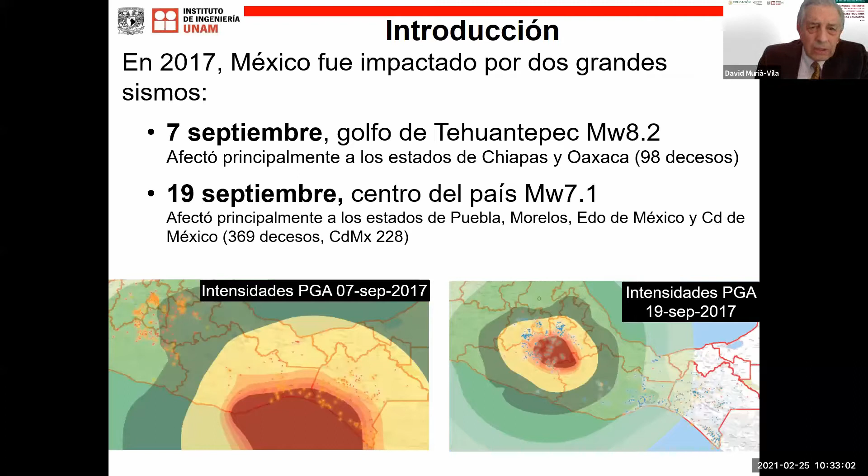The number of deceased people increased to 369, out of which 228 were located in Mexico City. The number of affected school buildings was higher, 19,000. 63% were minor damages, 36% were moderate to severe damages, and 1%, 210 schools, required reconstruction of part or the totality of all school buildings.

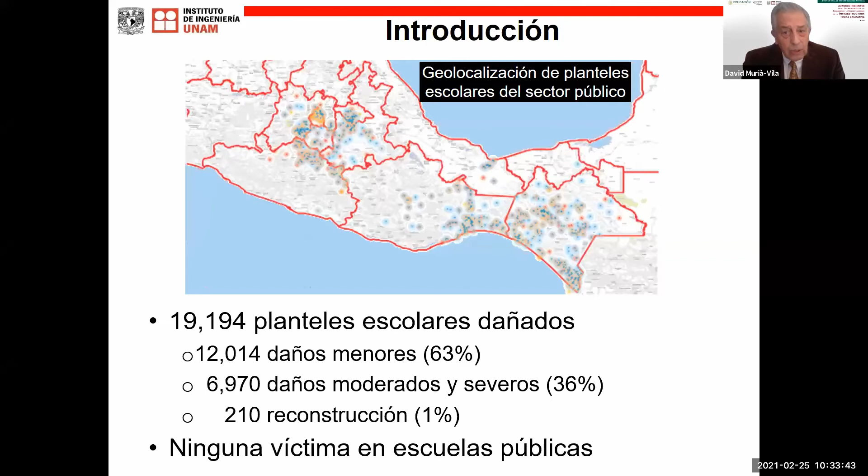In the case of public schools, there were no victims.

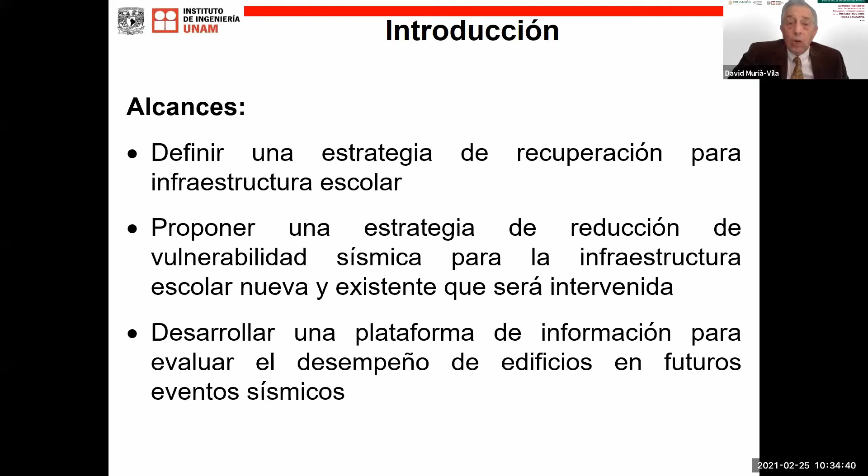The Engineering Institute partnered with INIFED and the World Bank to contribute to the gathering of evidence and the promotion of a wide and safer school program, to generate knowledge based on evidence, analyzing school buildings' performance in these events in order to inform and document the recovery process. The scopes we defined were to define a recovery strategy for school infrastructure, to propose a strategy to reduce seismic vulnerability for the new infrastructure that was going to be built or intervened, and to develop an information platform to assess the performance of buildings in earthquakes.

We set up a database. This database includes more than 12,000 buildings, amounting to 13.2% of damaged schools and 35% of schools with moderate to severe damages. We found that the quality of data varied, as well as its integrity, so we will have to put in effort to increase that quality.

We heard just a moment ago that we have created this database, which is a great thing. I don't know if it's covering all cases, but it will without a doubt be very useful for the study of damages. School buildings were classified according to the material and their prototype. The prototype means the buildings that were designed and built by INIFED and CAPFCE over the past 75 years.

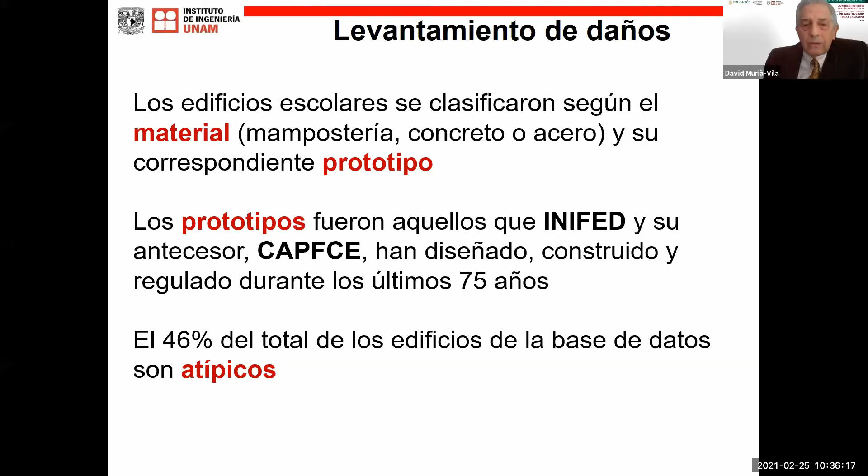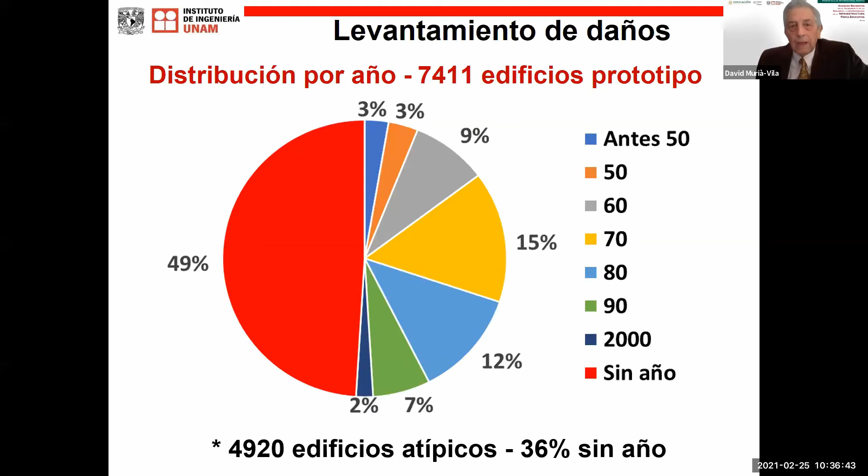In the database, 46% of all buildings correspond to buildings that did not belong to a prototype. In these prototype buildings, we don't know the year of construction, we don't know their birth certificates, which is an important piece of information that we need to know.

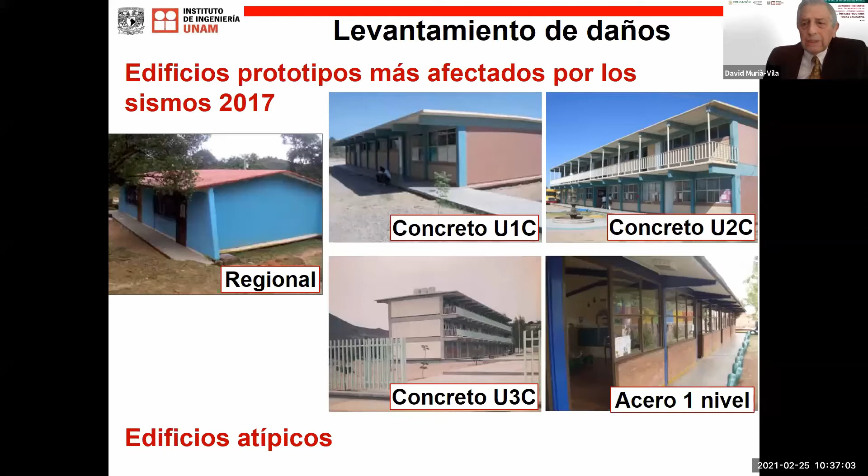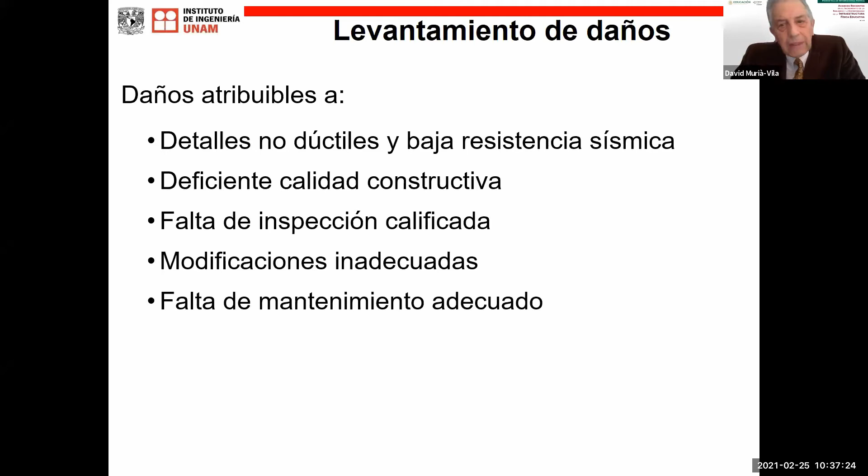The most impacted prototype buildings were the original prototypes: the 1, 2, or 3-story concrete buildings, and steel 1-story buildings. The damages can be attributed to a setup of non-ductile details, lack of constructive quality, lack of maintenance, and lack of inspection. The construction age in Mexico is important.

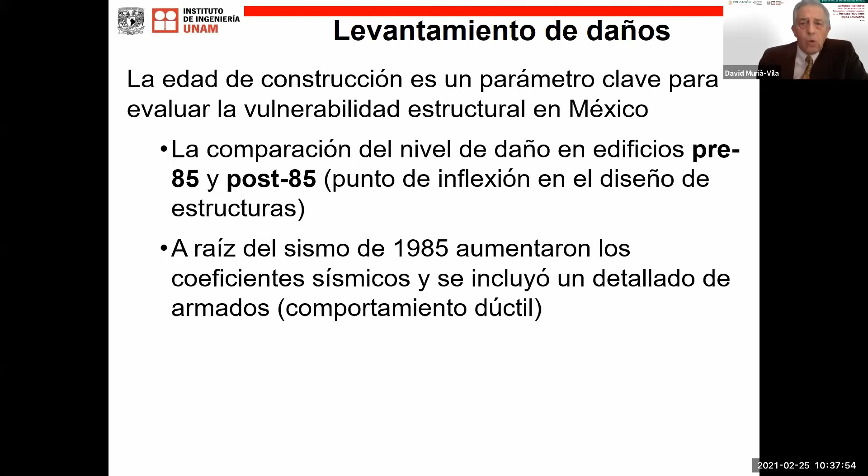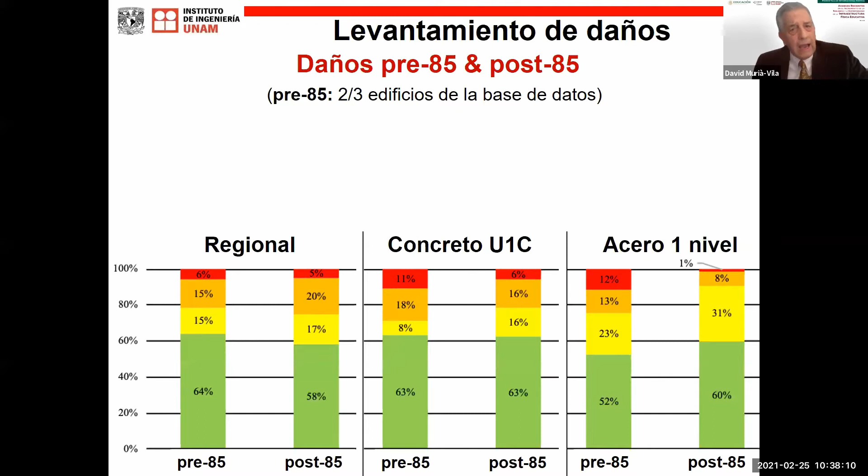Comparing buildings in terms of damages before and after 1985 is a watershed in structural design, because after the great earthquake of 1985, the seismic design indexes increased and ductility became the focus. So in the comparison of damages pre and post 85 in our database of buildings, 2/3 of those buildings are pre-85.

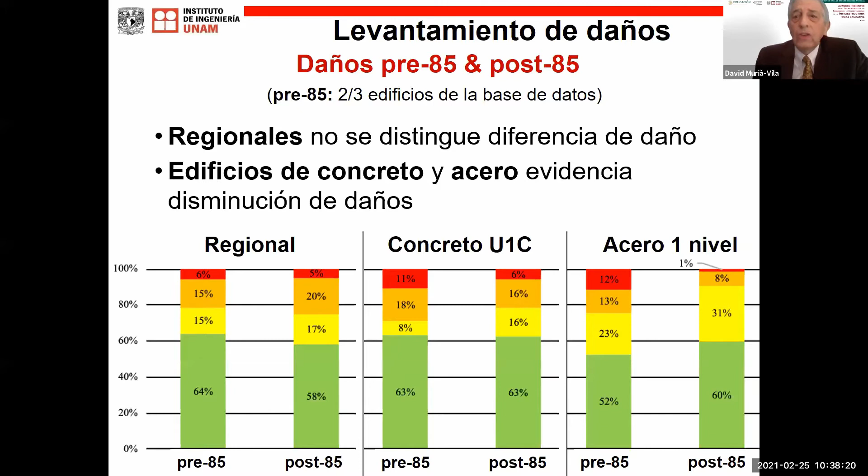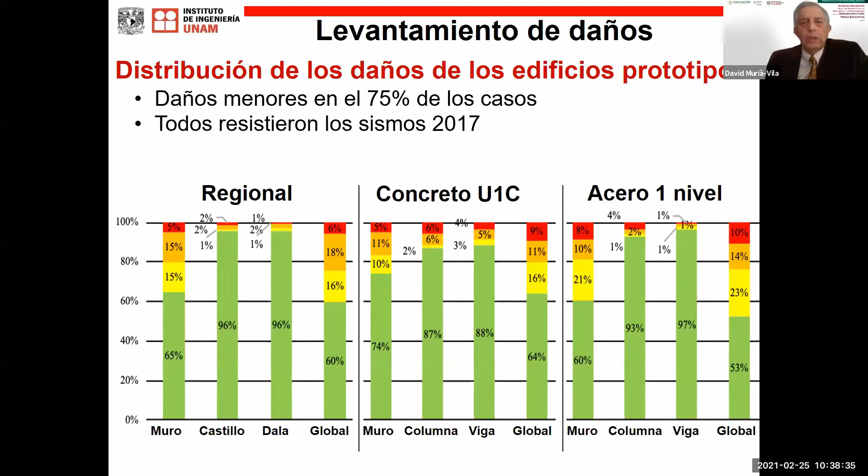The regional masonry buildings don't show any difference in damage, but in the other types there is a reduction in damages. 75% of cases registered less damage, and they all withstood the earthquakes of 2017. Regional concrete and steel buildings all have masonry walls, which is where the damages were concentrated.

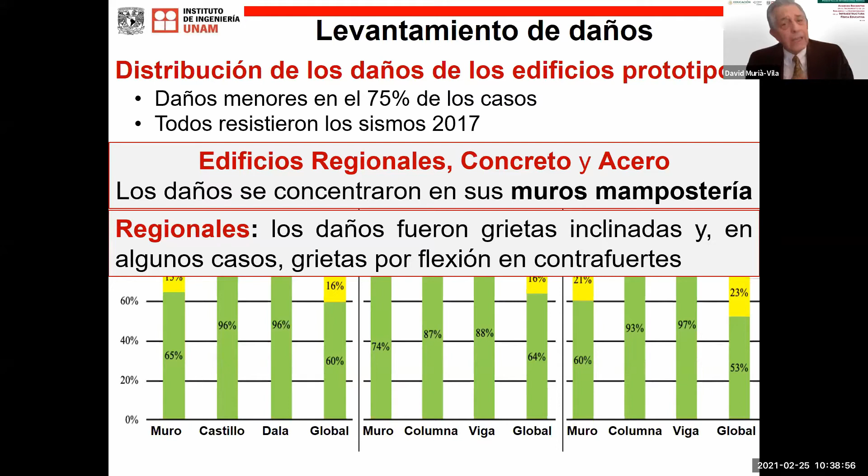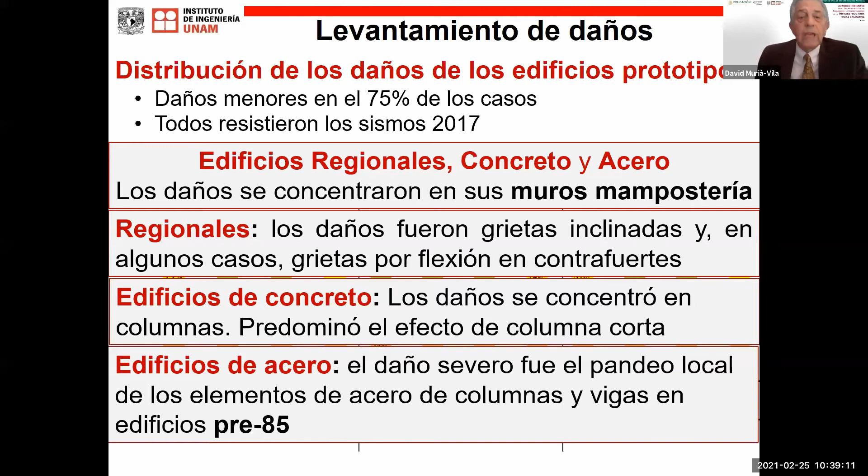In the regional buildings, we're talking about cracks and flexion cracks. In concrete buildings, the damage was concentrated in columns, and in steel buildings we saw damage to columns and beams, in pre-85 buildings.

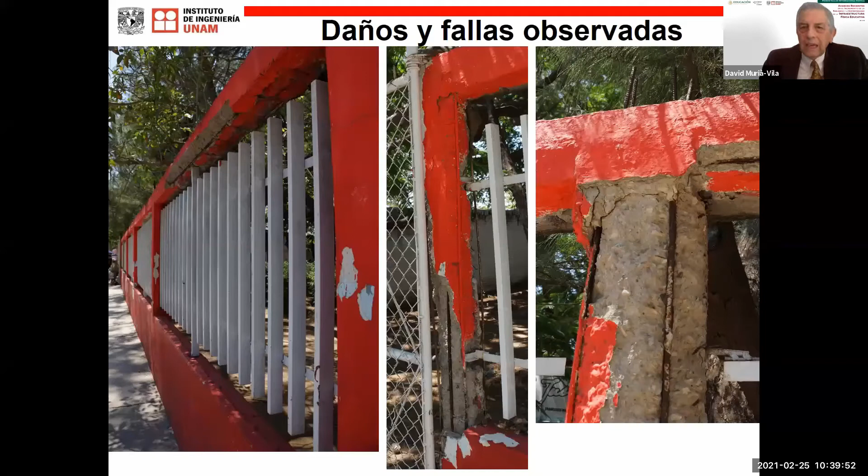In order to identify the type of damage, the quality of the information in their certificates, and to carry out an environmental vibration study, we performed field inspections in Oaxaca, Morelos, and Mexico City. I'm going to show you a series of images to illustrate one of these concepts. We see a fence with noticeable deterioration and deficient maintenance.

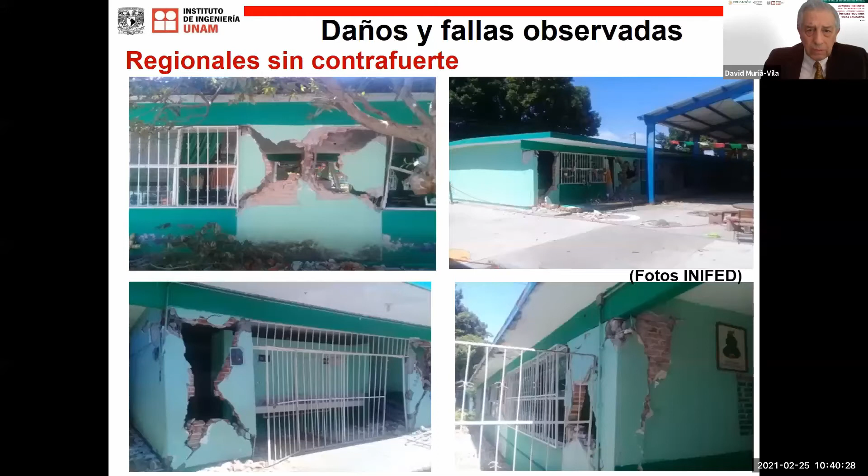The regional buildings with damage in masonry walls, without buttresses, thus decreasing the strength of these walls and resulting in less performance.

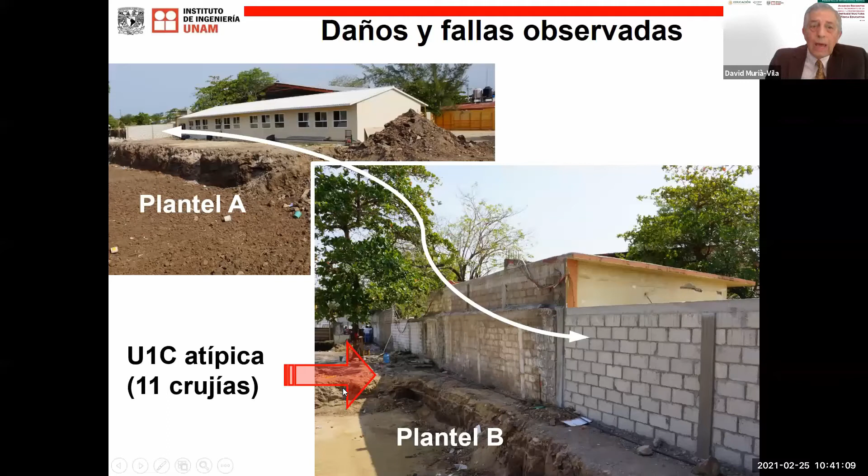On this side, we see two schools right next to each other, and we found that the structures that were damaged were being rebuilt. We don't know why it was determined that they had to be demolished. But what we did see was in school B, a concrete structure.

We have one of the segments here. You can see the damage versus this structure. And on this side, you don't see it because of the branches, but you can see it right here, yes.

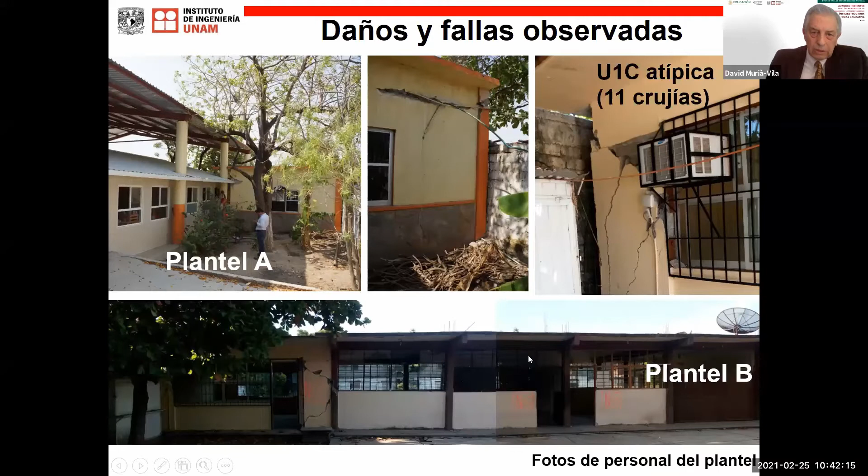And with those photographs, this is school B. We saw the structure here with this slab that had clashed with the neighboring school, the one right next to it. And they had built an additional classroom, therefore altering the prototype school building and turning it into an atypical school building.

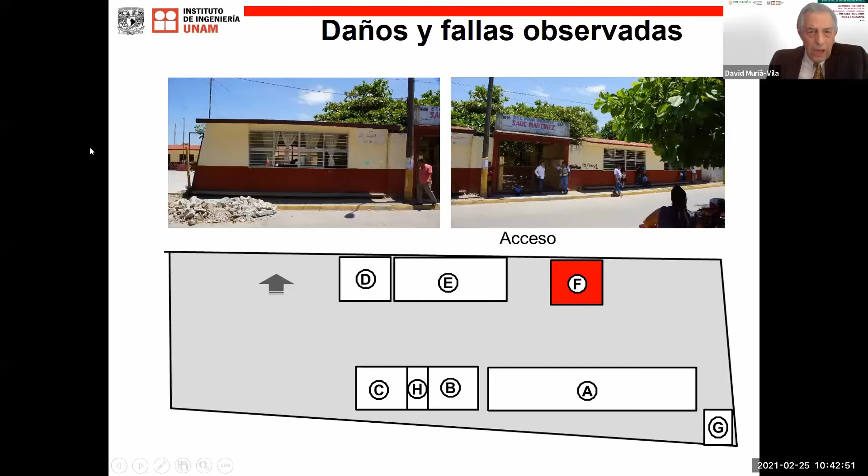Now, in terms of the regional ones, they all had very good behavior. However, you see damage here. What happened was that one of the beams here was anchored or connected to the school wall. And that's what was causing all this.

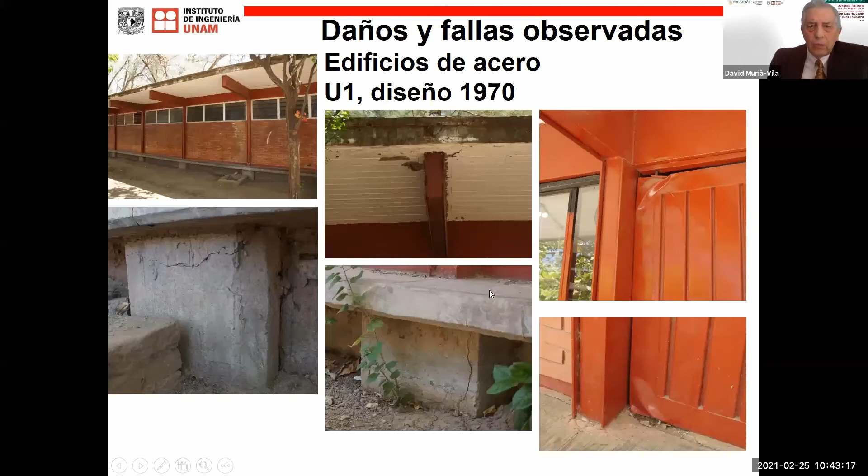Here you see foundation damage, not too serious, but you can see it. Roof problems as well, and you see this door. This is the vertical damage. This was not written down when the survey was done, it wasn't on the documentation. And this, the steel structures.

This is a thin wall profile, and you see this because of the low walls. But those that had a different profile, the low walls did cause it to be damaged.

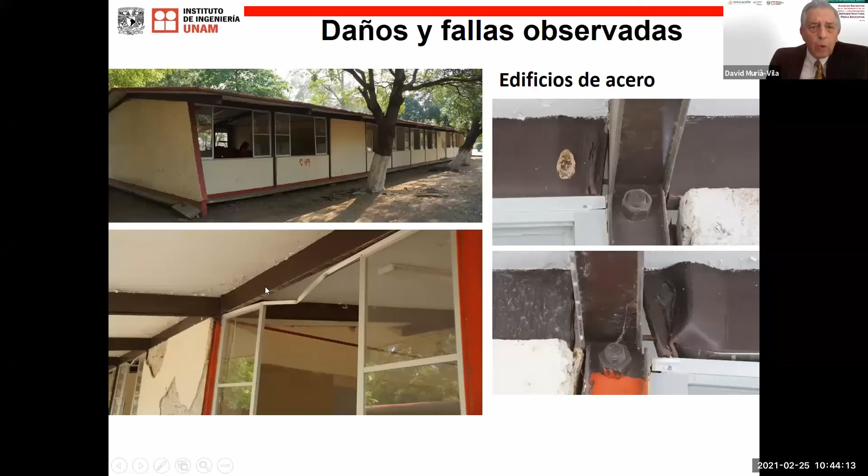Now, this, you can see this in the beams. This is a steel structure, and there's a construction here with acceptable performance. And this was easily corrected, even with the bending of it. However, these classrooms were not being used.

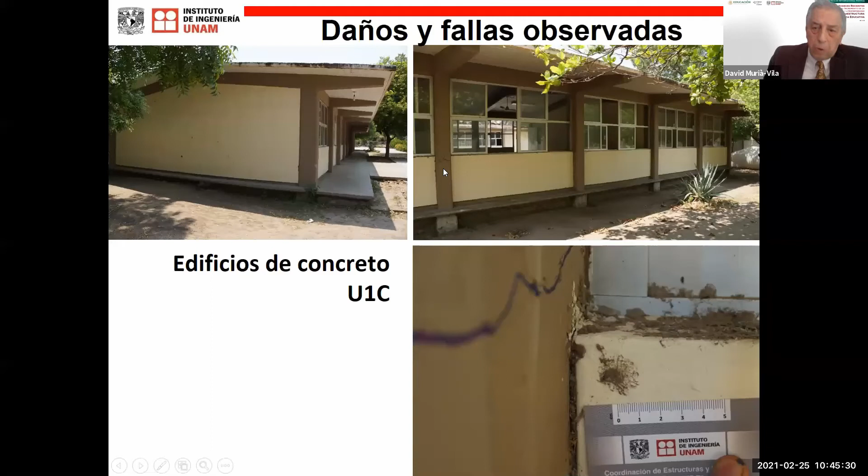So that students could continue having their classes there. This is the concrete building, one-story building. There's a problem between the low walls and the column. There is a separation as the prototype regulations set forth. Moderate damage on the columns here because of the low wall.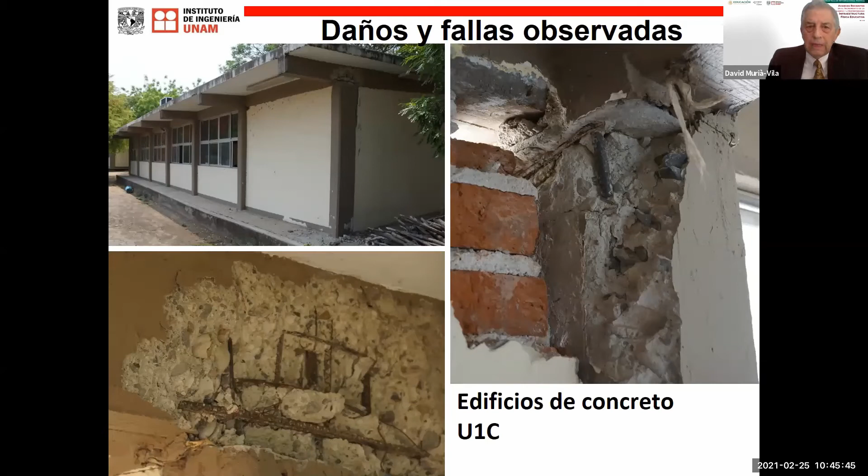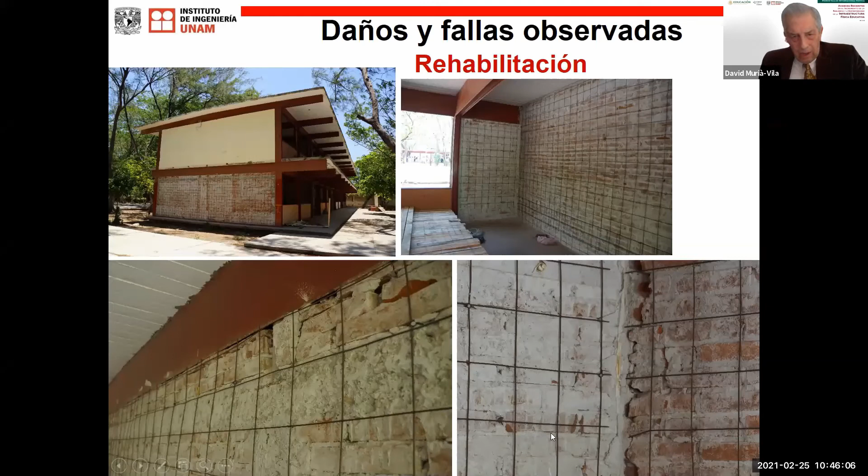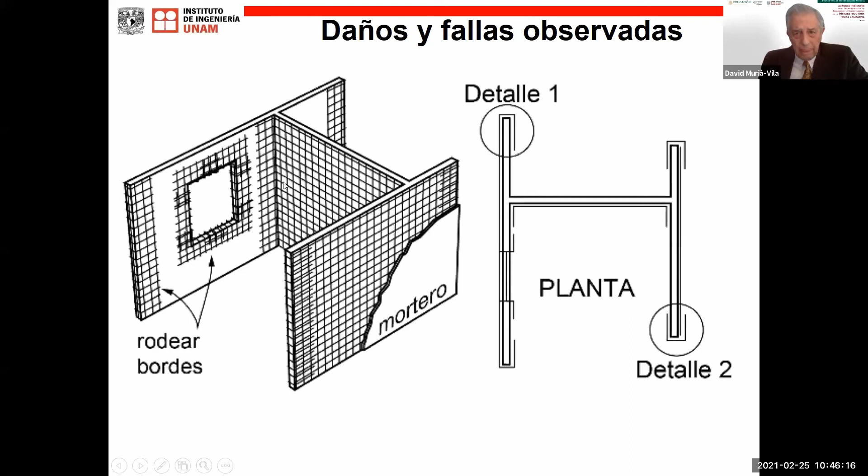These are other buildings showing the use of inappropriate additions without meeting specifications and standards. This is lack of supervision. And here we see the rehab, the jackets, and the ties here to the perimeter. This is already included in the guidelines.

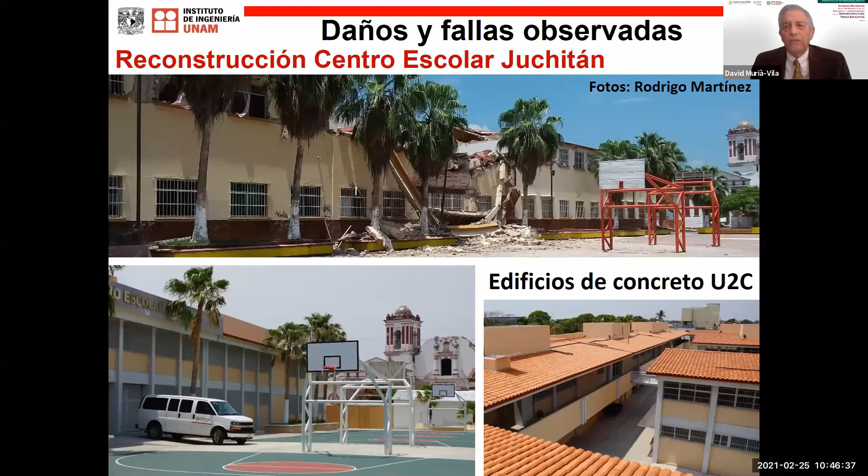In the case of reconstruction, this is an emblematic case. A lot of it was covered in the media. This is in Juchitán, a school center. It was a local collapse, no victims. It was reconstructed with two-story concrete buildings.

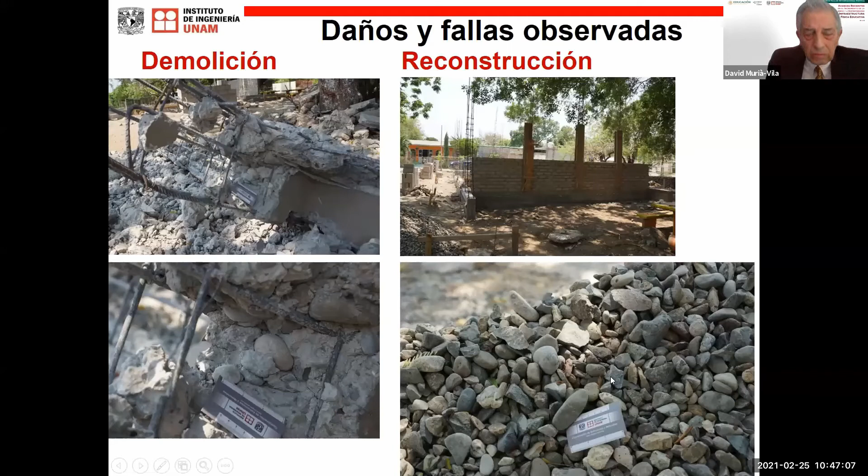Here we have another interesting case. You see here, demolished elements. We do not know what the structure was like, but this shows inappropriate additions or expansions without following specifications. In the reconstruction, they were doing exactly the same, using the same type of materials.

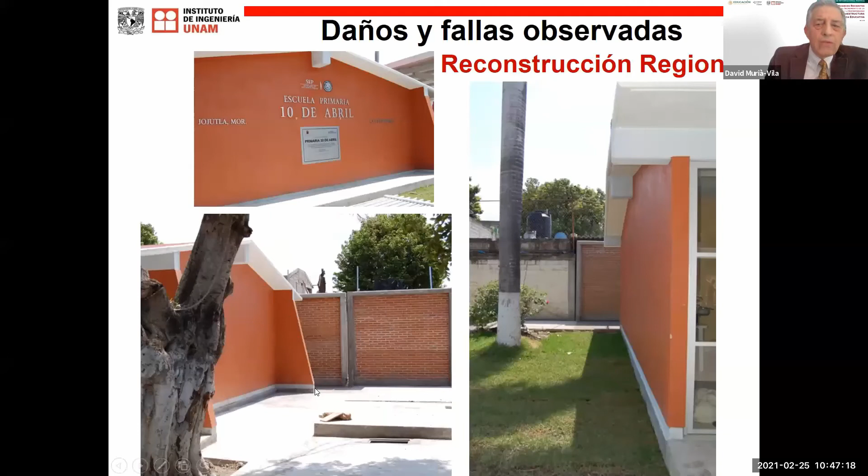Here, a regional one. This is regional reconstruction. The same masonry here, but no supervision. And this should be there, but it's not.

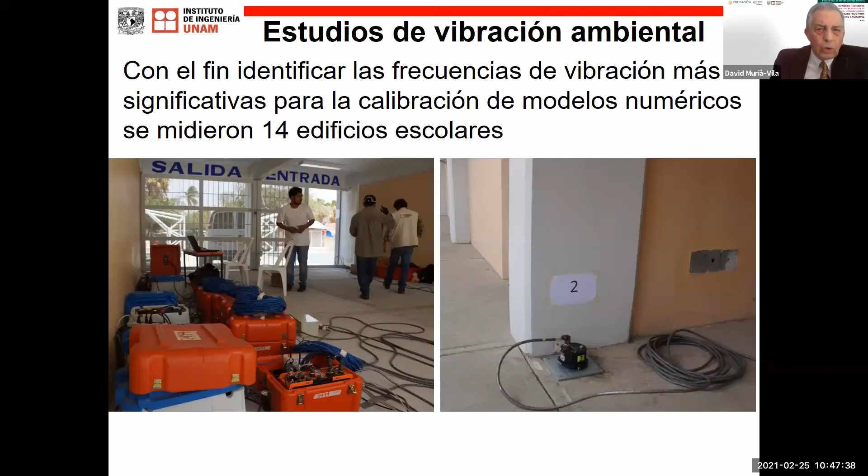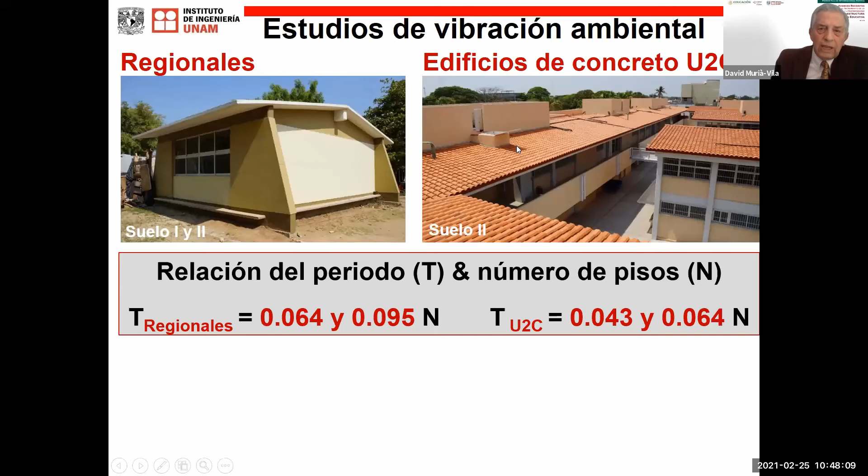Now for the numerical inspection, we checked or inspected 14 schools, regional ones, and concrete buildings. And we can see that this corresponds to the values we know of structures under good conditions, of course. Minor damage or no damage whatsoever.

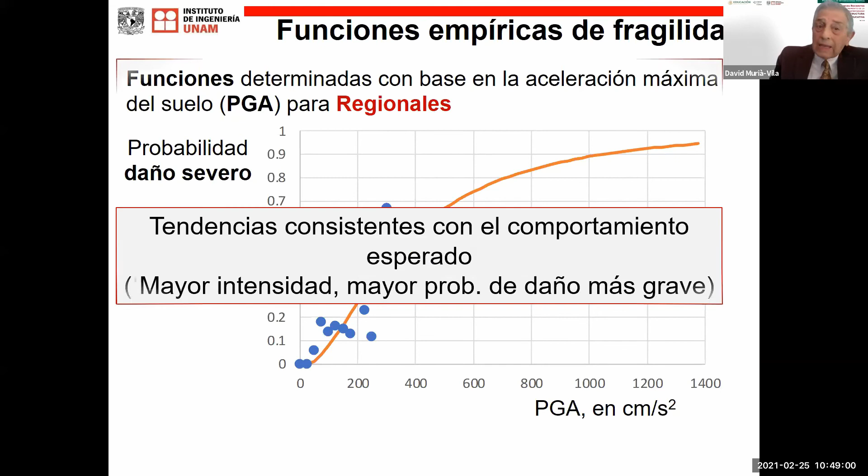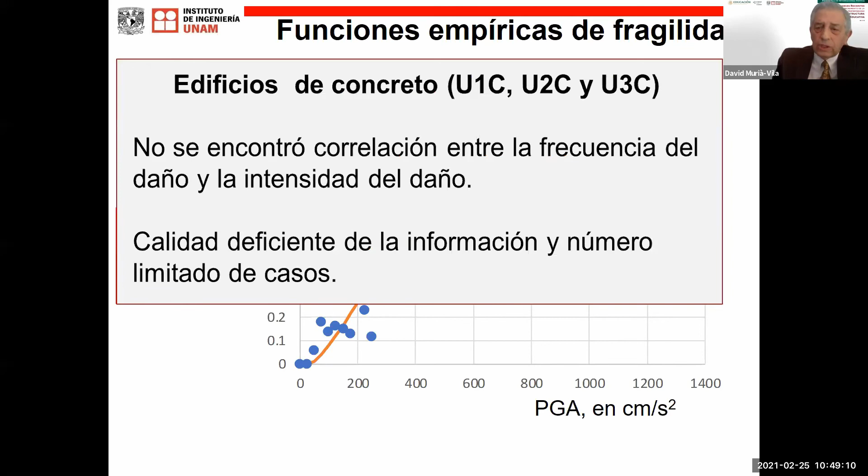To give you an idea, to do damage studies, we have to look at seismic intensity and damage levels in buildings. We did an analysis in cases where we had very precise data and damage elements. Here you see the severe damage probability at the regional level vis-a-vis intensity. And this is maximum ground acceleration. Expected behavior: more intensity, more probability of damage. In this case of concrete buildings, we did not find this correlation between frequency of damage and damage intensity.

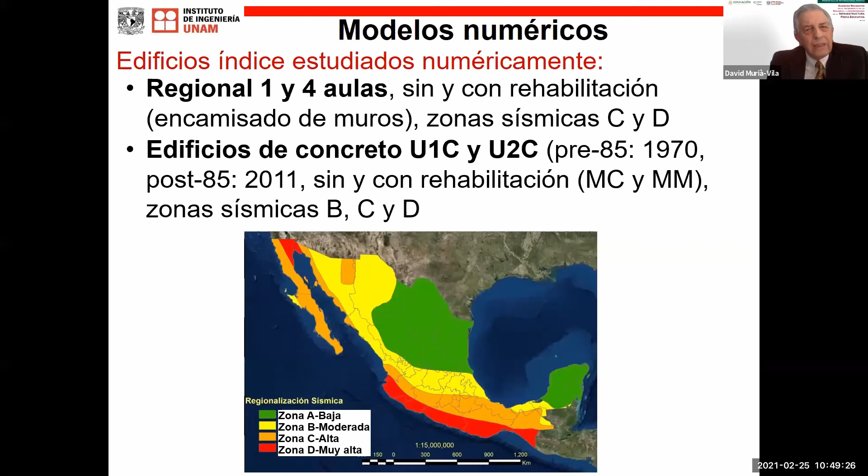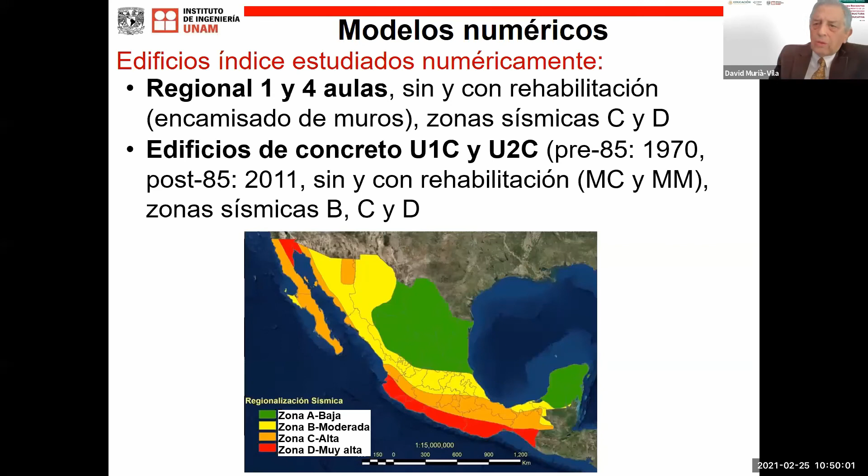Numerical models. We did numerical studies through models to see the behavior or response of the buildings. We selected a regional one, 1 and 4 classrooms, with or without retrofitting, and the jacketing of the walls. And concrete buildings, 1 or 2 story buildings, one built in 1970 and the other one in 2011, with or without retrofitting of the concrete walls.

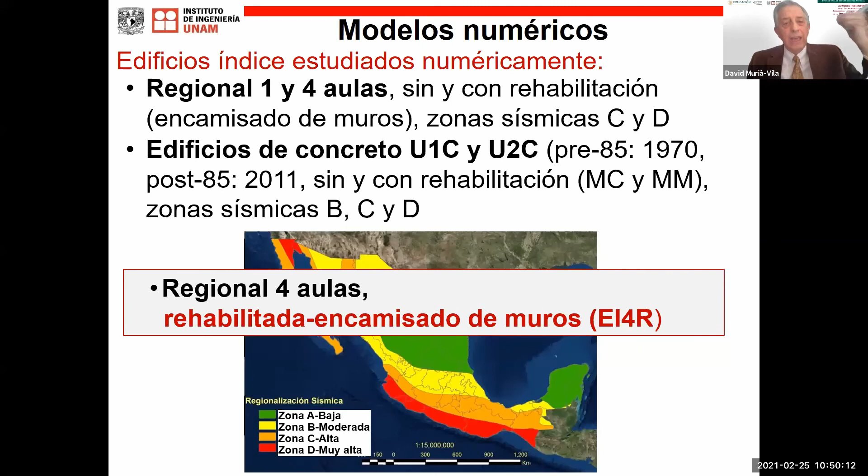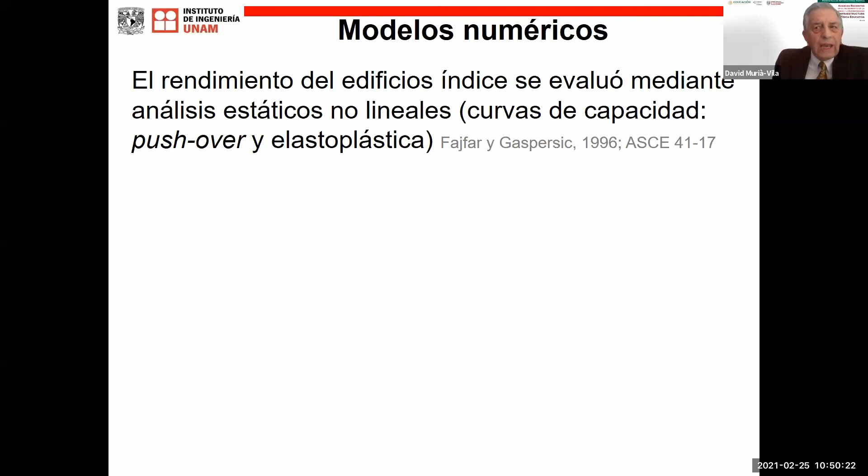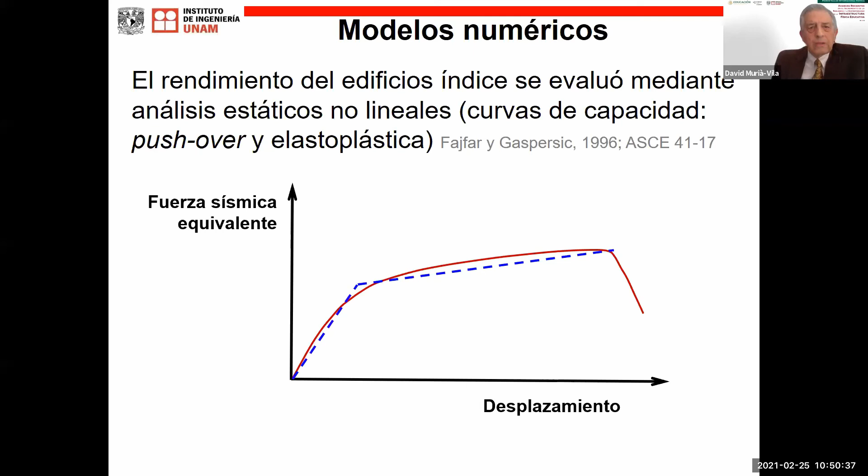Let me just tell you about the regional project we did. I don't have much more time for anything else. Now, the performance was assessed according to static analysis. I'm talking about nonlinear static analysis, capacity curves and pushover, and elastoplasticity. This is the equivalent seismic force and displacement.

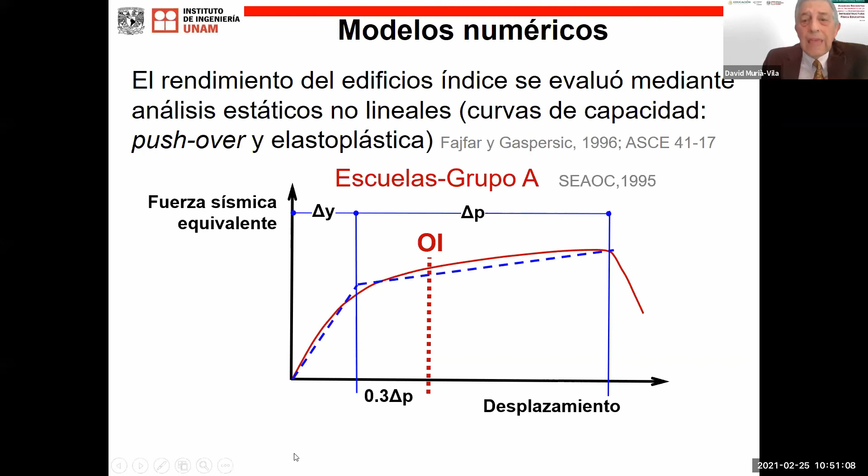You see it right here. As of that point, remembering these are group A schools, we shouldn't just look at the maximum displacement that is to be tolerated in nonlinear deformation as of the plastic deformation. It should be less than that to guarantee the operational part of all this.

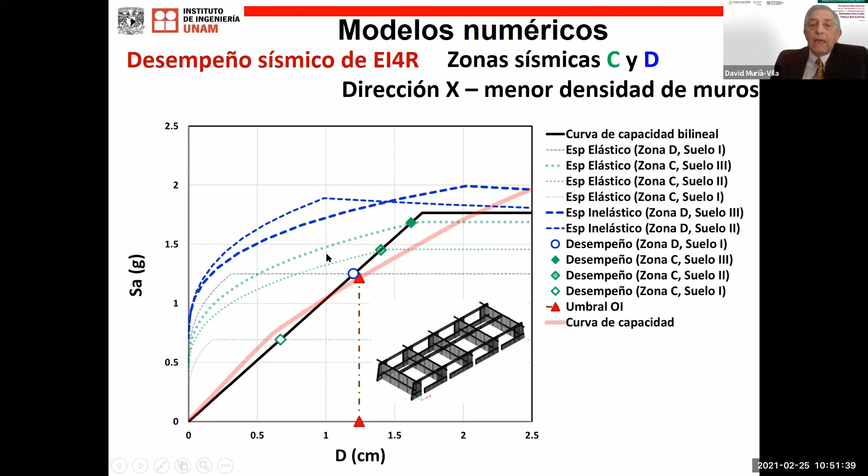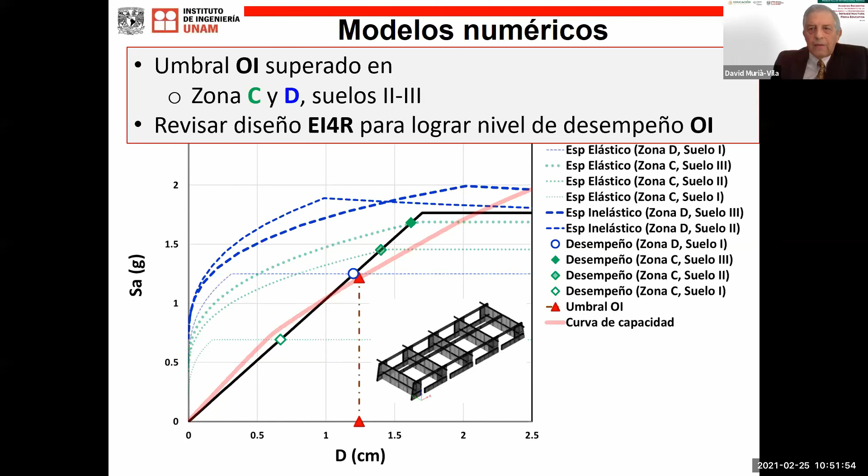This is the capacity. You see the curves right here of this 4-story classroom, of this 4-story school, and you can see that only in these cases with type 1 soil or ground, we can see we should only inspect zone C and D with soils 2 and 3. And this is the lifespan or the limit.

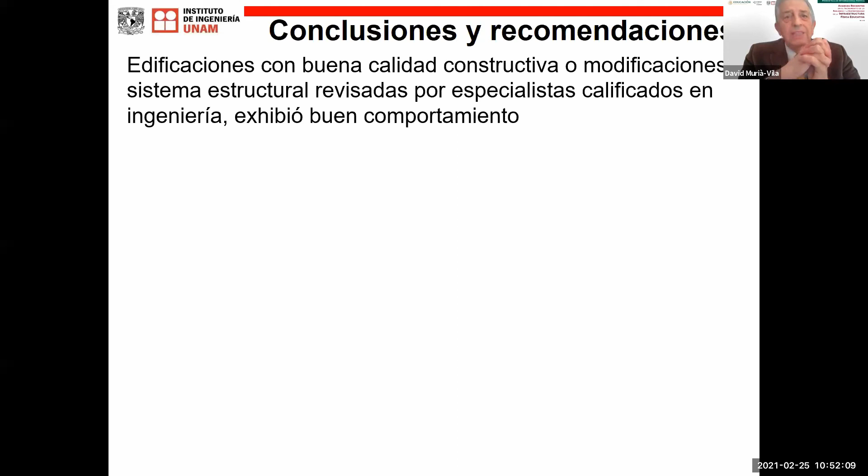Conclusions. Buildings with good construction quality had good behavior. Based on analyzed information, we proposed recommendations on policies, techniques, implementation, sustainability, and to divulge all that information to minimize school seismic risk. And also, we proposed a strategy to increase seismic resistance, strengthening all this through the different experiences in different parts of Mexico, as well as implementing a program for all this.

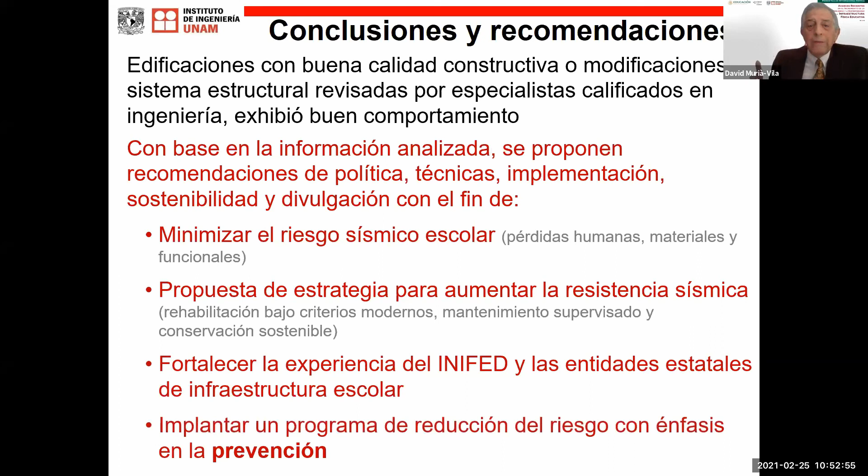And this program should be there to reduce risk. For reduction of seismic risk, we recommend a comprehensive, systematic, and pluriannual strategy, especially for buildings made before 1985 and also atypical buildings. Design, construction, inspection, maintenance, and conservation of schools, and this should be done through guides and manuals.

We know, not only through this event, but we know that conservation and maintenance are very poor and deficient. In terms of safety and rehab evaluation of structures, this should all be done through guides and manuals. The manuals are there, the guides are there, so they should be better used.

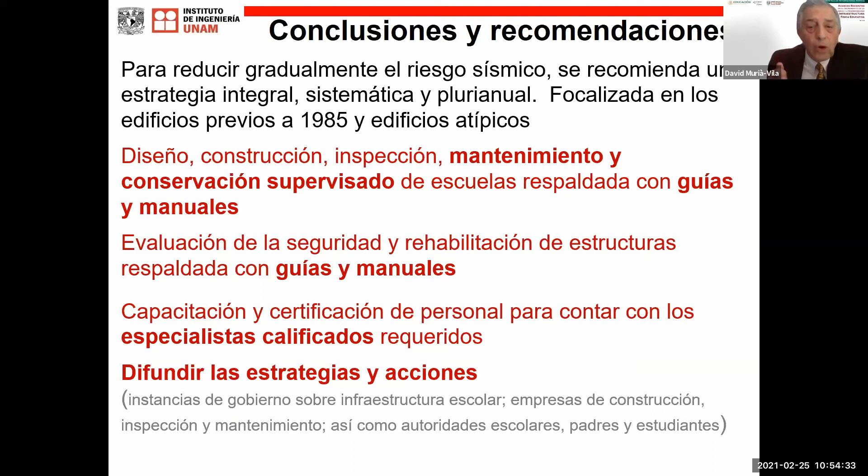In terms of training and certification of personnel, it's important to have high-skilled and qualified specialists to do those training sessions, and also disseminating strategies and actions through different government instances related to construction, inspection, maintenance, and the participation of school authorities is also of the utmost importance.